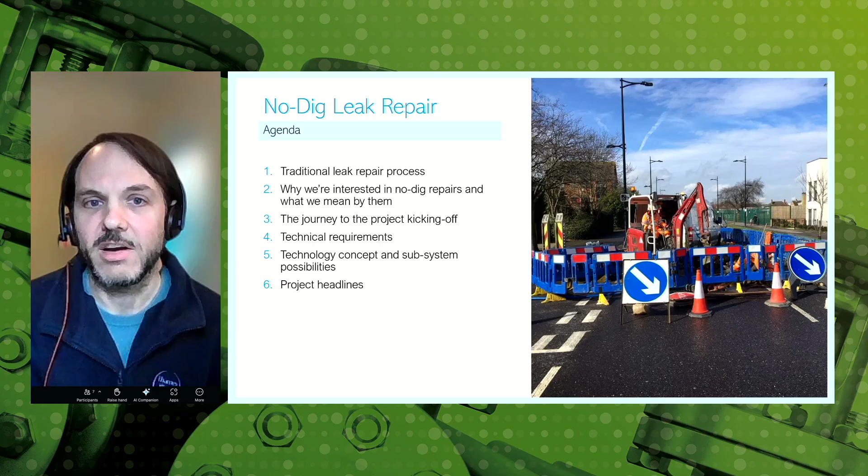Moving on, the project is not looking to do anything at all about the detection process. So the process as is would be the process that we would be using. I don't want to focus on that in detail, but just to emphasize that process will typically end with blue paint on the road, marking up a 1 meter square, and that's about as well as we can know the location of the leak before we dig. And that excavation might need to be extended - it's not guaranteed to be within that 1 meter.

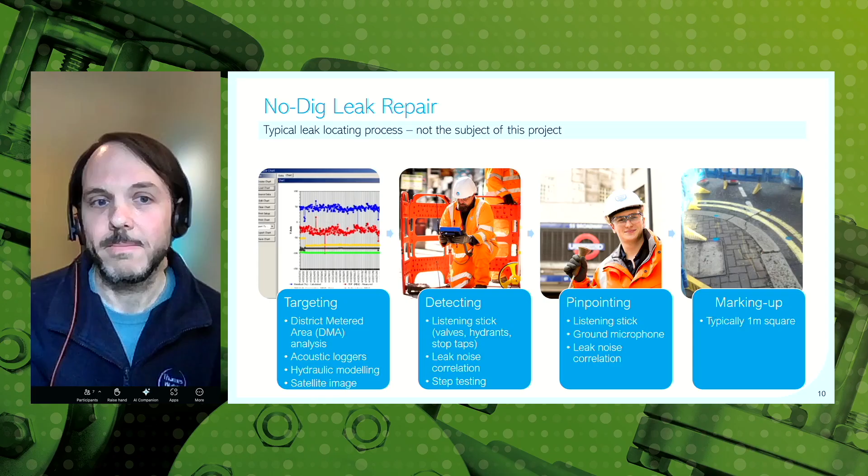So next slide. The leak repair process we're currently all using is essentially quite a protracted process. Some of us are more efficient than others at getting from one end to the other, but it's quite an onerous process. I'm not talking about emergency digs here, I'm not talking about burst mains - this is all about hidden leakage. So you've got planning, lots of planning steps involved, liaison with the highway authority, scheduling resource, and this process might be days, it might be weeks.

And then when you get to site, you've got to set up the site, traffic management, do your buried utility tracing, and then you've probably got somebody else coming to do the repair, to excavate and pump out. You might need to have some technicians available to throttle the main or even isolate it. And then you get onto the actual repair itself.

And once you've done that, then probably you've got a different team who come along and backfill, possibly someone else again to do reinstatement. And then you've got to clear the site. So that's quite a protracted process.

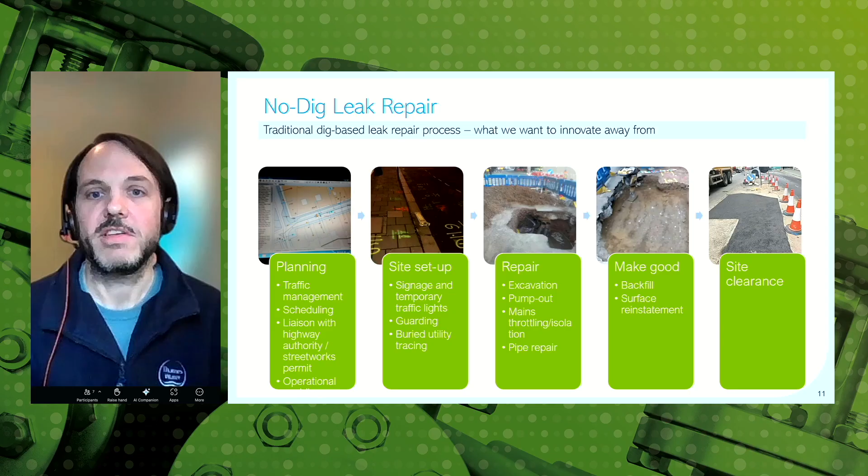So moving on, the reasons why - first of all, just a slide on the actual types of failures we see. So not all of these are likely to be hidden leaks.

Some of them are going to be visible. We've got quite a variety of leaks. And the reason I'm showing these is because we're not likely to be able to repair all leaks that we find. So we need to be able to identify which one is which before we try and repair it.

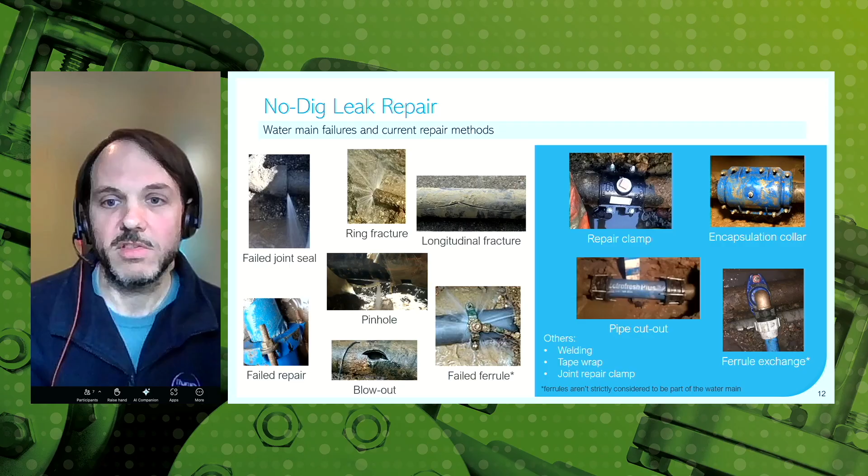And then over on the right, you've got the various different dig repair techniques. Most likely to be some form of clamp or a pipe cutout if it's a more severe failure. So realistically, what we're targeting with this project is external repair clamps. We're not looking at situations where the pipe would otherwise have to be cut out, because the chances are then that the road's been washed away anyway and we have to do a dig.

Next slide is talking about some of the key issues with the traditional process. So the cycle time I've already called out. So all the time that we're going from the leak being detected and marked up in the road through to the repair being done is water lost. And there's also the cost of all the different activities that are involved in allowing this process to happen.

We know it's a very disruptive process, causing inconvenience to customers and road users. And there's the associated societal cost with that. And then there's damage that could or sometimes does happen to roads and other utilities.

So primarily there's the safety risk with utility strikes. And then there's various additional costs that follow as a result of that consequential damage. So those are things that we all, we're trying to find a way of moving away from.

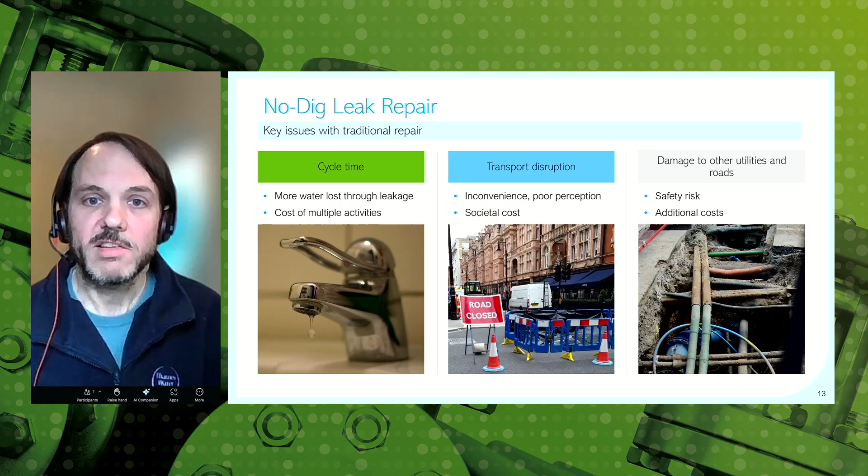Next slide. So why are we interested in no-dig leak repairs? So I've taken out the slide that I would have given on the background to leakage, because this is the leakage conference, so no need to hammer that home.

But just to kind of reiterate something that Jeff mentioned in the introduction, and which sounds like JSE talked about yesterday. So on the PALM acronym, we know that there's a lot more been going on historically on awareness and location of leaks, with less attention being given to preventing and mending leaks. So Jeff's already mentioned about mains renewal not being a viable approach, at least in the short term, to delivering the kind of ramp up in leakage reduction that we need.

Can we just do more traditional find and fix? Yes, within reason, but as I said, it's very disruptive. So with the diminishing returns we get from fixing smaller and smaller leaks, that disruption becomes less and less proportionate. And we're going to reach a point where that's not credible either. So we think that a repair solution that avoids interruptions to supply and reduces transport disruption markedly could play a key role. So we're kind of seeking a transformational change here, really, to water mains repairs.

We're almost kind of skipping a couple of steps ahead and looking at what the ultimate future could be like. And we want to increase the rate of leakage reduction, but also have it happening at lower cost. Next slide.

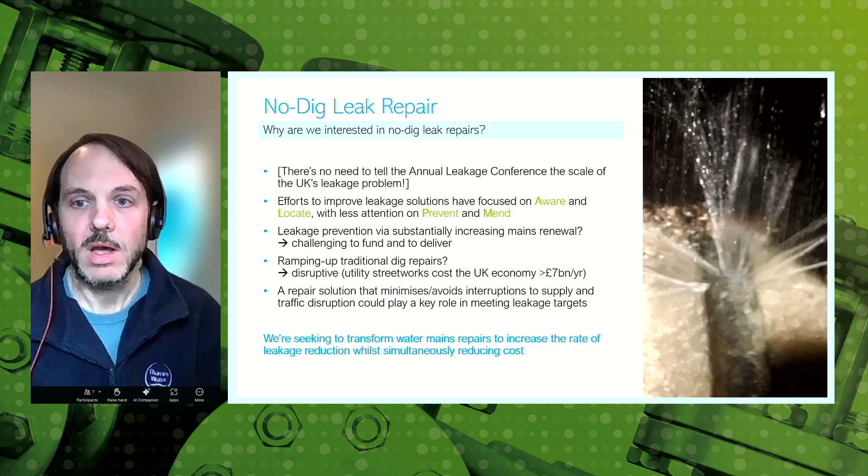So what are we aiming to achieve? So there's a diagram on the right that's kind of like an illustration of the kind of the principle. We want a technology that is able to enter a water main via an existing asset, probably a fire hydrant. But the point is, we don't want to have to dig to install a new asset. We then want to be able to locate and identify the leak.

So if we know that it's the wrong kind of leak to repair, we won't attempt to repair. There's no point. We also need to be able to pinpoint it more accurately than the kind of plus or minus 1 meter, because a repair needs to be in exactly the right place.

And then we obviously want to be able to carry out the repair and test that it's been successful. And throughout all this, we want, as I said, no excavations. So not just keyhole excavations, but no excavations. Nothing wrong with keyhole excavations. I'm all for it. But this is kind of perhaps a more ambitious project than that.

We don't want to cause any supply interruptions to customers, and we want to minimise transport disruption. And we want this whole process to be completed faster than dig repairs, so not only the time on site, but also the lead time between detection and arrival on site. And it has to be competitive on things like cost, health and safety, and carbon, otherwise it's not going to get adopted.

When I was checking everything I had in these slides, I realised I'd missed out water quality. In the editing process, I removed what is the single most important requirement we've got to fulfil, which is it has to be Reg 31 compliant and not cause any deterioration of water supply to customers. So overall, the goal is to move from where we are now, where we've got lots of potential technologies that aren't yet integrated, to having a prototype no-dig leak repair solution that will be viable for future commercialization.

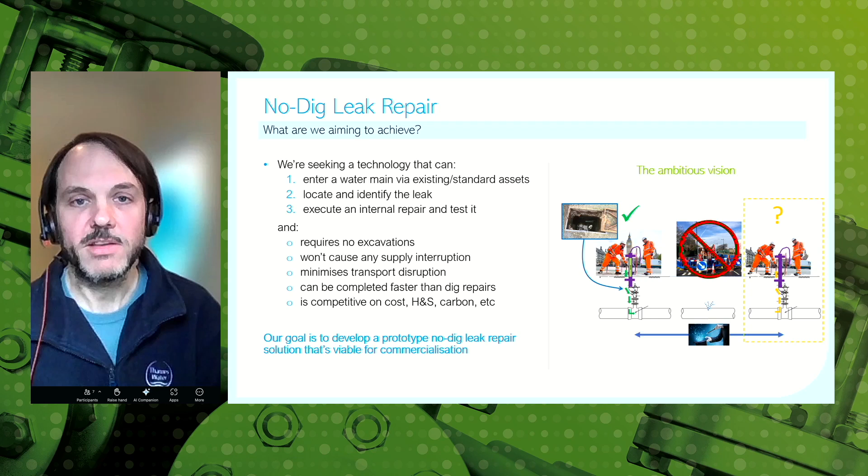So the journey we've been on - I left this in because I thought it would be of interest, because we have been on a journey. We started off thinking this could be a challenge-led project, and we went to the Ofwat Innovation Fund saying, please can we have some money - we don't know who we're going to work with, but we've got a great idea for a project.

And they said, seems a bit risky, we're not convinced about it. So we went away and did some more work, did a technology review, got some funding from Transport for London, and improved the submission. And that still didn't cut the mustard with the Ofwat Innovation Fund.

So we went away and had to think about it, spoke to Ofwat about it. We realised that the uncertainty of a challenge-led project wasn't going to get past the fund as it was then laid out. So we decided to progress with the first stages of the project ourselves and then go back later. We went to the Northumbria Innovation Festival in '22, engaged with the supply chain and the industry, and improved our technical requirements.

That helped garner interest for our sourcing process, where we had 6 bidders for a formal tendering process. We selected 2 to carry out a concept development that we funded ourselves, and that yielded 2 very credible project plans, from which we chose the one from Synthotech and their partners, ALH Systems and WRC. So when we went to the Ofwat Innovation Fund again last year at Breakthrough Challenge 4, the project was clearly a lot better developed, a lot lower risk than it had been, and we were awarded the funding.

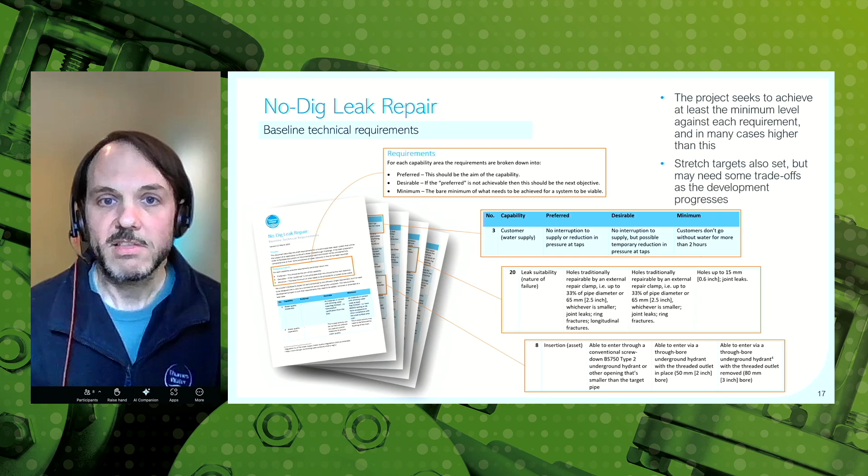So those are just kind of ideas, really. It's definitely not the case that we're talking about this being a spray lining solution. This is definitely a localized repair, but spraying a sealant on is one of the possibilities.

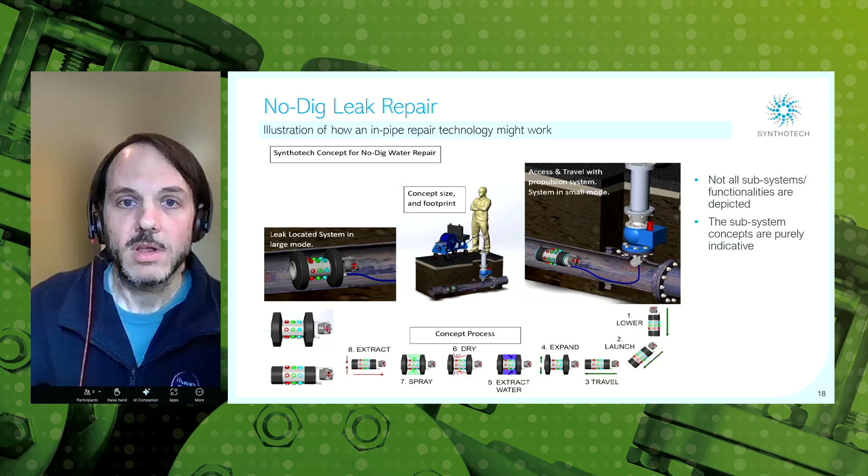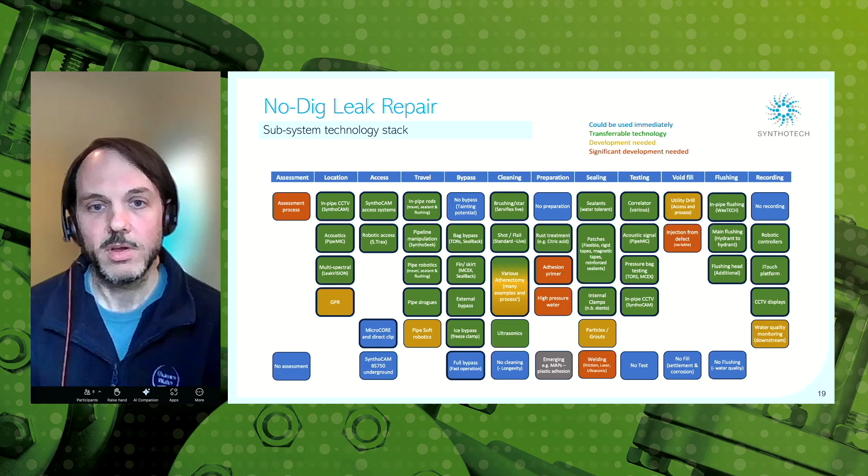So the ones in blue are already in use. Green would need a bit of development. And as you move through yellow into amber and red, those are things that are less credible. Synthotech have got lots of ideas to work through to decide which of the individual subsystems are going to be most suitable for integrating into a final product.

We've got funding from Dŵr Cymru Welsh Water, Southern Water and Transport for London, and a whole load of other water companies providing the breadth and oversight to ensure this is an industry-wide suitable solution. We certainly don't want this to be a Thames Water solution, because that's not going to have the scale we want it to achieve.

And phase 5 is actually a thread that goes throughout. We all know knowledge transfer is an important part of these projects. We think it's going to be an absolutely crucial part of this project, because the project ends with a prototype being demonstrated - it doesn't end with commercialization.

So we want this project not only to help Synthotech move towards commercial use of this type of technology, we also want the rest of the supply chain to take interest and pick it up - maybe using different materials than we're looking at, maybe throwing in different ideas for how to do different aspects of it.

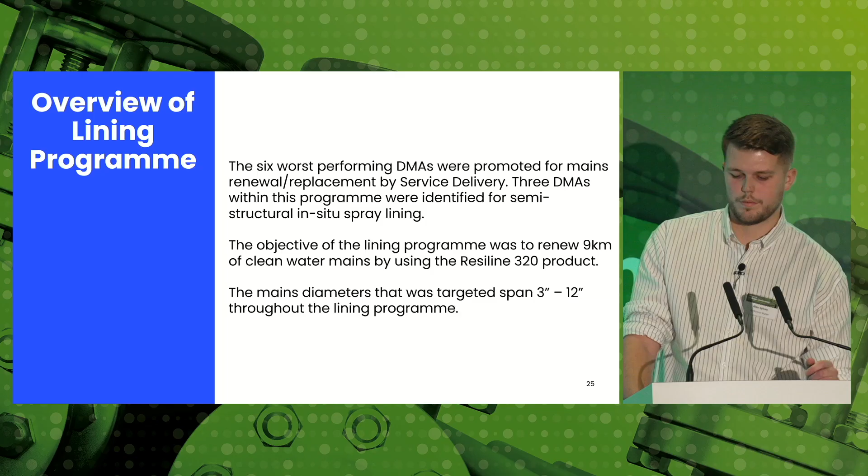So I'm just going to go into a bit of a day in the life at Yorkshire Water and where we tend to start off and what each step goes through on that process within that day. So the start off is the cleaning of the water main. Just to mention, this is all done within the isolation period of 3 hours.

So the live water main is isolated, cut out, and we go from fitting to fitting. So if there's 2 valves either side, they'll be exposed, removed, and then we use those 2 as the reception pits for the lining.

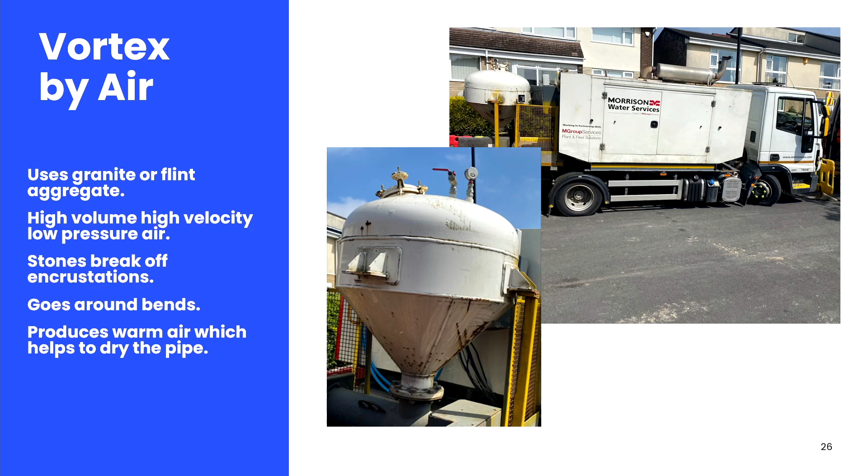So that'll usually span over about 300 metres depending on the size of the water main and also the condition, as well as pre-investigation works that we've already done on that section of main.

The first part is we use a cleaning method called Vortex by Air, which is the Whirlwind, used by Morrison Water Services at this moment in time. The ins and outs of it is we use air.

To blow through a vortex within the water pipe, and it'll go from one side into the reception side. And also, if there's high incrustation in that area of the water main, we also use flint or granite double-washed aggregate to remove any incrustation within that main. So it's high volume, high velocity, but with low pressurised air going into that system.

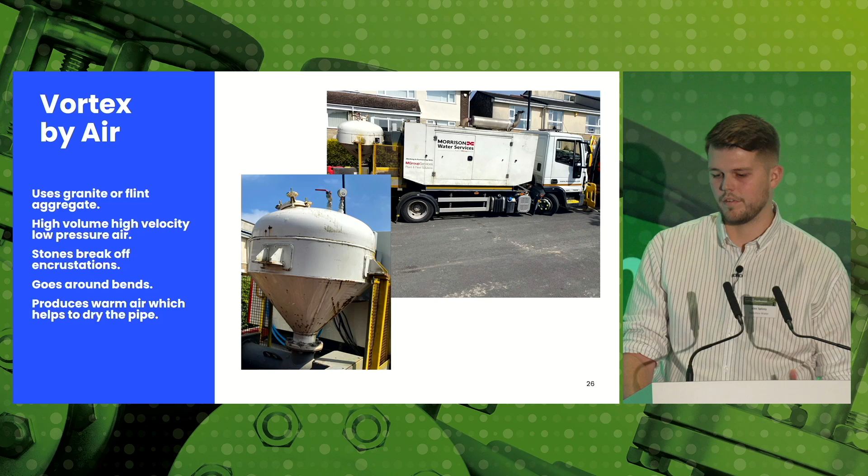The good thing about this as well is it does go around bends, so it's been a big win for us using this system throughout the whole of the programme. It also produces warm air, which helps to dry the pipe along the side of us cleaning it, which is really good.

I'm just going to show you a diagram of what it tends to look like on site. You've got your aggregate pots and your blower unit with a connection pipe from one side of the water main. The vortex of air or stone goes through there to clean that pipe, then it'll go back into another connection pipe, and an aggregate catcher will take that in.

We look to use 3 to 8 inch diameter mains for this method. We also use drag scraping for anything above 8 inch. And with that, it cleans and dries it within an hour as well, which is a big win for us on the isolation period.

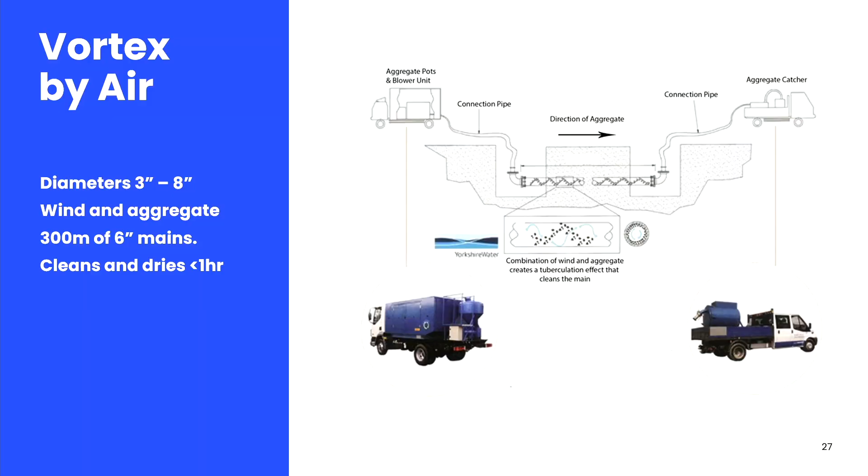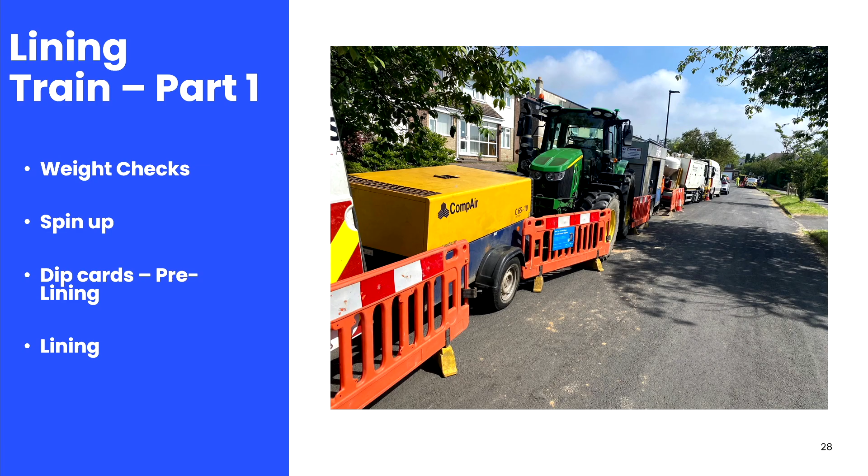On the lining rig just behind the tractor at the moment, that's where all the magic happens in effect. The hoses, the paint, is all weighed and measured out in this area. We have to carry out 3 weight checks on the lining material to make sure it's to the right mix ratio for the correct application.

That's done at the preliminary stage, and also the tanks are always warmed up to their optimal temperature to ensure that the material is cured and set at the right temperature.

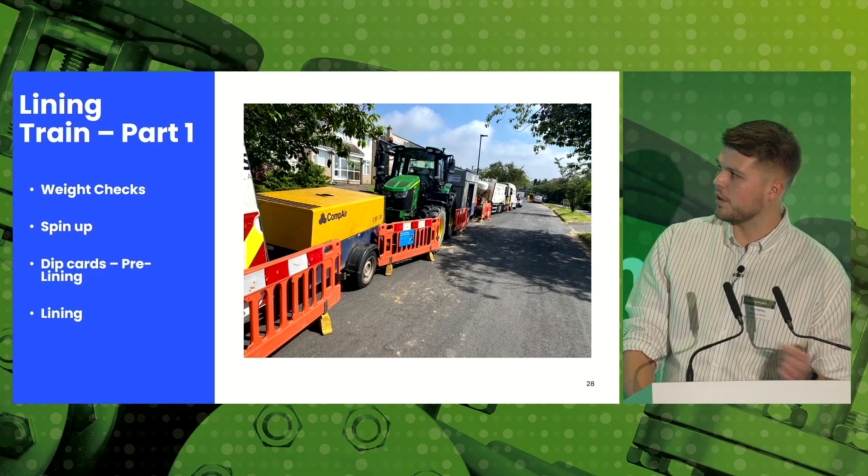After that, you pull your hoses through after your cleaning, put the lining head to the first reception pit at the other side of the job, and you'll carry out a spin up. At that point you're making sure all your paint's mixed together correctly.

Then you will take your dip cards pre-lining. The dip cards are taken to ensure the mixture of the paint is in the correct thickness, the tactility is fantastic, and also to make sure there's no other concerns that can be raised from a visual look at that dip card. Once you've done 3 of those dip cards at 10-second intervals, you'll then begin with the lining.

The lining commences by putting the lining head within the pipe, and the lining rig's got a controlled flow meter unit that will pull the lining hose back throughout the main at a constant flow. That's all controlled electronically, and if there are any issues with the flow or anything inputted into the rig, there are tolerance limits.

With the flow rate, if it goes plus or minus 10% of the flow that's in there, or the thickness that's applied, an alarm will raise and that will shut off the rig, and that section will be abandoned if it's not deemed suitable for the criteria we need to meet to agree that. That's a little bit at the start of the project of the lining section.

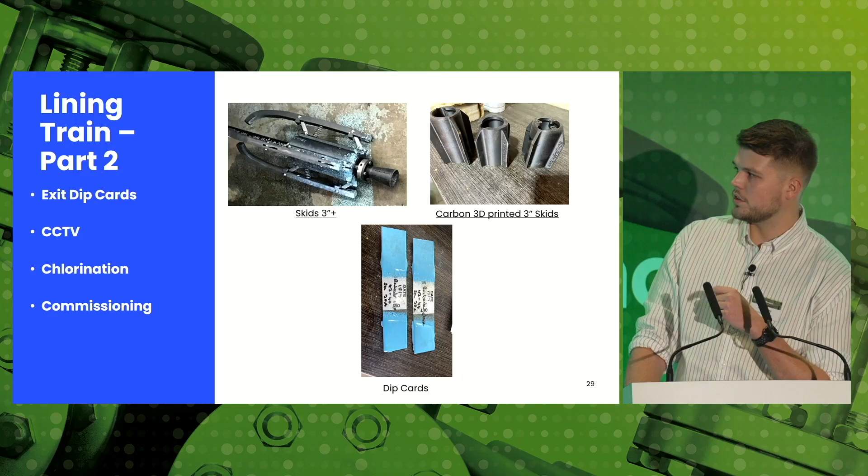Once that's done, we will go in and have a look and make sure that all the lining is uniform and there's no misses or misjoints, anything that could cause a potential defect, and a re-investigation into that, and a dig out and remove.

So the 2 pictures at the top, we've got the lining skids. The top right is what we use for the 3-inch work that we did in York. It's a bit of innovation - a 3D carbon printed skid.

This gives us a lot of benefit on the 3-inch schemes, because we've had a lot of issues historically with bends in this area, and this removed that massively. So it was a really good success story. And then anything above 3 inches, we use the more traditional skid that we've got there.

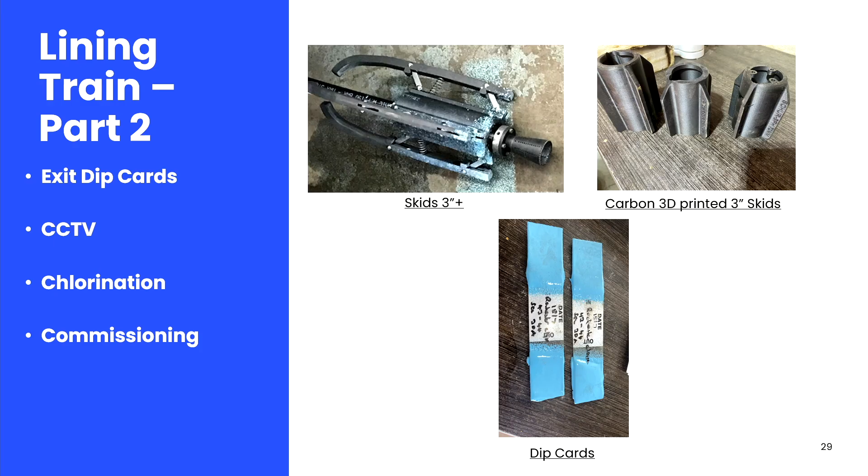From the CCTV then, once the hour cure is complete, we will then go into the chlorination unit. The Whirlwind has its own chlorination bowser, which puts 1,000 parts per million and sprays that into the new line pipe. From there, the main will then be flushed and be back into commission, all within the 2 hours and 59-minute isolation period.

So these are just a bit of an image for you guys to see. The top is from the works at West Bar Green, on an asbestos cement pipe. For obvious reasons, we weren't putting any flint or aggregate down on this one because we didn't want to expose any fibres. So it was just mainly air that we put down to dry the pipe.

And on the right is the lining once carried out. The bottom left is the 3-inch cast iron that was being worked on at Chestnut Avenue in Stockton Lane in York. Historically 3 inch has always been a bit of a hindrance for us guys trying to line. So the use of these skids, and also the Whirlwind and the vortex by air using the flint and aggregate, has provided a lot of benefit in this area.

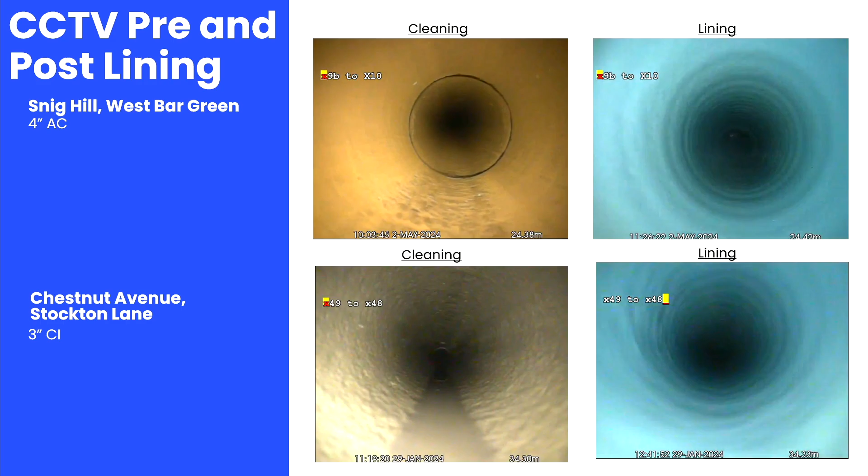It's been fantastic. In terms of quality control audit purposes, we do have the 7 different remits that we've got on there. So after every lining that's carried out, we need to make sure that the CCTV cleaning documentation is there - the video, CCTV lining, a CCTV report, a quality assurance document is carried out, dip cards are still saved, and the rig printout from the rig itself should be in place.

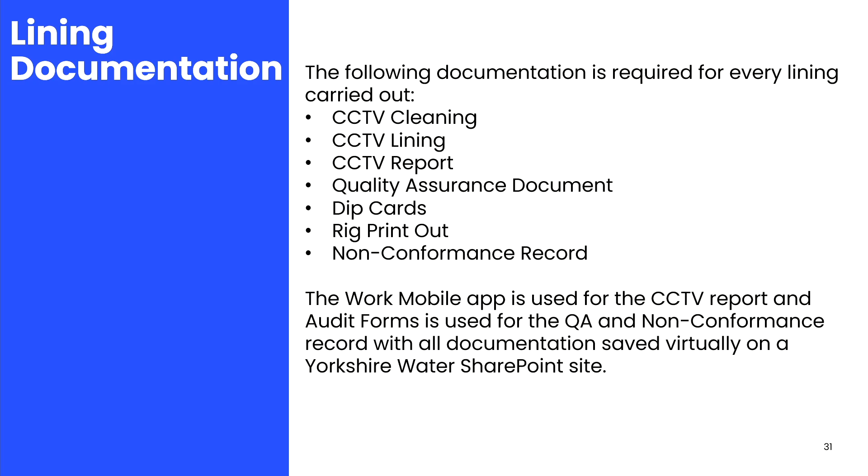And a non-conformance record - so if there is any defects at all, it is noted, and there's mitigation method processes that have been put in place. This is all done electronically now, other than the rig printout and the dip cards, which are still - images are taken and stored on an internal share drive. We've got quite a lot of cameras and videos of clean pipes and line pipes at the minute.

In terms of the outcomes, the 9 kilometres have now all been lined and successfully renewed using that semi-structural lining method. West Bar Green is beneficially complete with final sections of open cut being carried out on Fulwood and Stockton Lane. In terms of cost saving, just for West Bar Green alone, we did have a £560,000 saving using semi-structural lining compared to traditional methods.

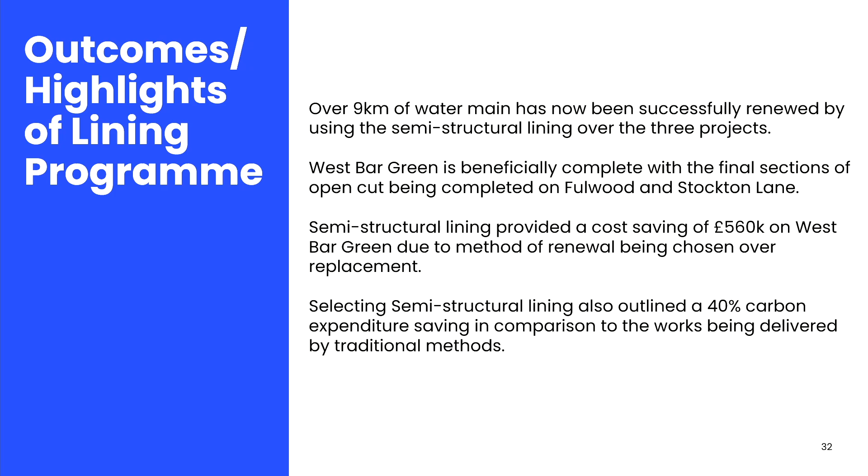The semi-structural lining also outlined a 40% carbon expenditure saving in comparison to the works being delivered by traditional methods. Like I said, it's just 2 excavations instead of a long trench with the traditional methods. So there's been masses and masses of savings in that respect.

In terms of the key learnings from the lining process, I'd say the big one is the cleaning time. It's something that needs to be worked on because I think within the process of cleaning your pipe into your final lining, your commissioning, your flushing out for samples, you've probably got on a good day a 10-minute window period if your cleaning goes well.

It's something we're actively looking at the minute. We're speaking with suppliers and manufacturers about getting that cleaning time down. But two good success stories were the methods used for preparing ferrules before lining.

On site we called it ferrule sucking. In effect, it's putting a cap end on the back of the main, charging some air through with the whirlwind, and just opening and closing the ferrules to get any sediment or material that might have gone in there from the cleaning process originally out of the system.

That was a massive success, because at the start of the project we had a 45% blockage rate in the first couple of months. After adopting this method, we got it down to 4% by the end of the whole programme.

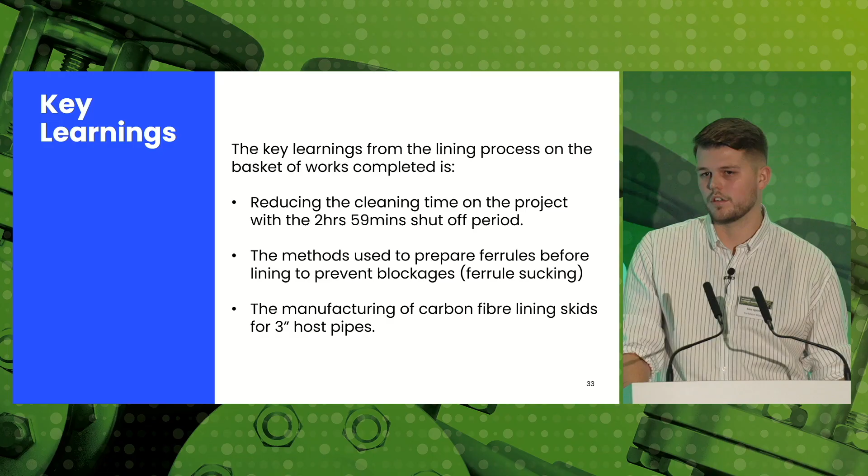We also used the carbon fibre lining skids for the 3-inch host pipes. There's been ongoing issues in the past with 3-inch cast iron, and using these techniques we've been able to line around the acute bends, which has been a really big win for us and improved the meterage we've been outputting on a weekly basis. So that's everything from me, and I'm sure there will be questions.

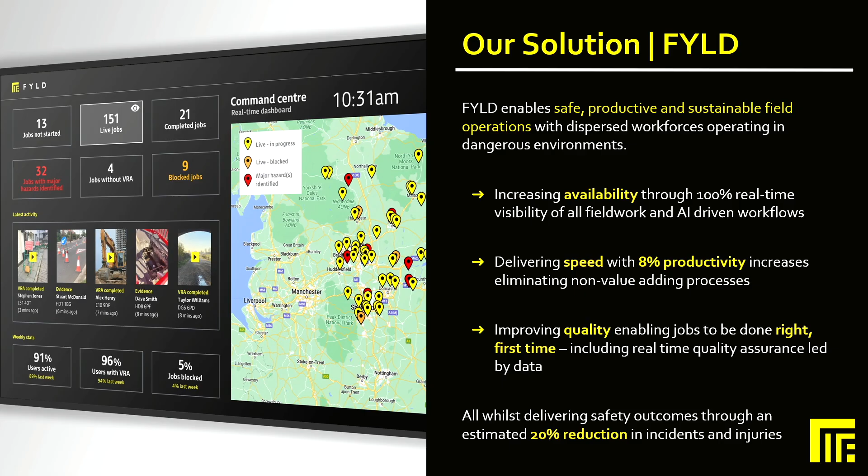Now what became interesting, when we started evaluating the process of how leaks are actually promoted from Yorkshire Water to Morrisons, we started to unpack that there were probably quite a lot of blind spots that could lead to delays or not getting to that repair and delivering it in the target time you had. So we approached Yorkshire Water and started talking to them.

If we got your leakage inspectors to use our mobile application to take videos of when they've located the leak, when they've marked up, what's the condition around that leak, and in turn, if that is shared with the planning department at Morrisons in real time, what's the actual benefit of that?

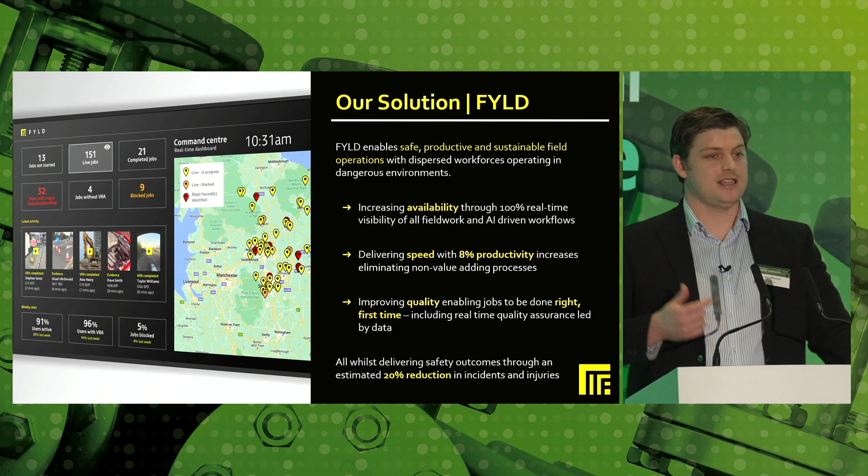Well, what we were seeing is that around 20% of the time, prior to using FYLD, they're having to conduct a site visit because they might not understand, okay, at that location where they've marked up, what are the TM requirements? Does it need to be out of hours? Is it in a customer's driveway? And often that could lead to the need for an additional site visit to be added in order to go and understand how you can successfully plan that job and then execute it.

Whereas now the process that we've embedded, you've got that Yorkshire Water technician using FYLD to take a video of the condition of where he's marked up. That planner can view it in real time and then schedule that to be released to operations.

So Karen and Steve are going to go into a little bit more detail around what that looks like.

I think my own reflection has been fundamentally a real behavior change from the ground. I think often static photo capture and manual data entry can be a bit limited. So when you start leveraging the experience of the operatives on the network, asking them to talk through what they see and show you, it's really increased the quality of information we're getting, and that information sharing between all the stakeholders within that leaks life cycle is what's driving speed and ultimately reducing leak runtime. So I'll hand over to Karen to talk to you about that from a Yorkshire Water perspective.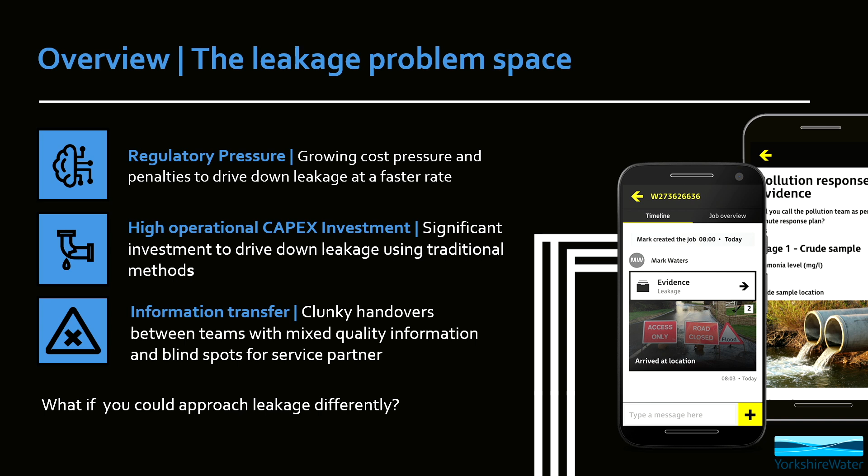So I guess this morning we've heard quite a lot about how expensive R&M can be, and we recognise there's quite a lot of waste in our processes. So we do spend a lot of money on dry holes. We don't always get it right first time. And the time taken to get a leak from the point we mark it on the ground to it being repaired can be quite long and protracted. So one of our business plan initiatives this year was to reduce the runtime of leaks.

Our processes, though, are quite clunky. So we use SAP to manage our work, and there are a limited number of text characters we can use in SAP to describe what we're doing, and we used to attach a photograph. But the processes were pretty poorly adhered to, really, and photos weren't really being looked at by the planners. They were using Google Street View to do planning and scheduling. Sometimes a blue mark would wash off.

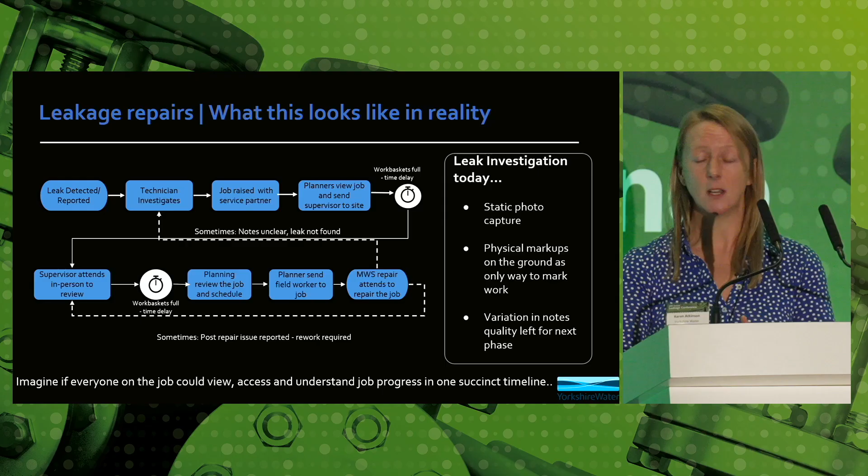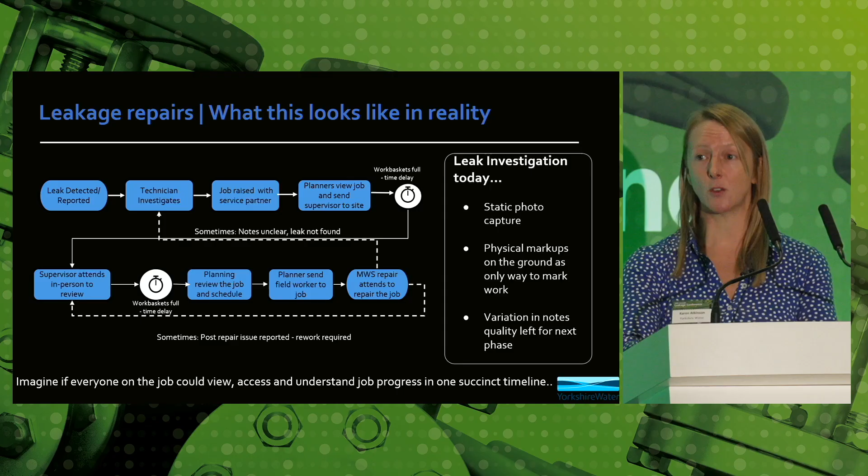And our leak inspectors felt a little bit disconnected from the process, and they were also struggling sometimes to understand when a leak had been repaired. If the quality wasn't quite there, they'd go back to site, check it, there was still a noise there, and they couldn't really understand what had gone on, because once the job went into the SAP machine, they never saw it again.

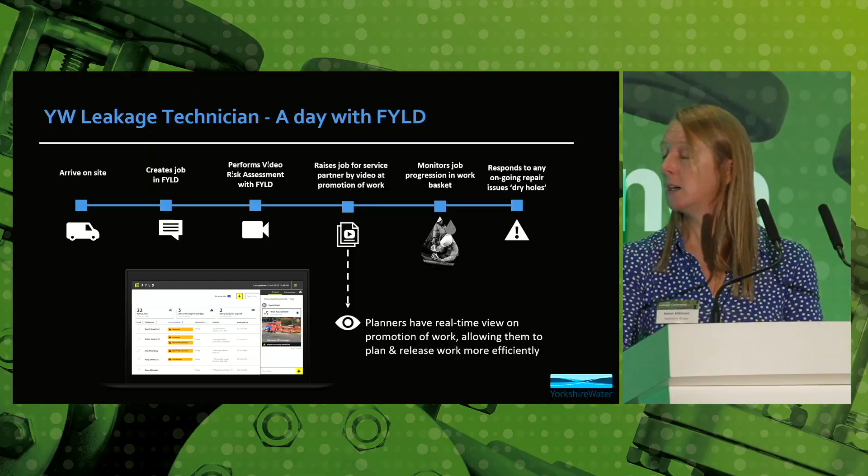So what it looks like today, a leak inspector arrives on site, and we actually use the FYLD app for our point of work risk assessments as well as our work promotion photos. I think previously our point of work risk assessments from a leak inspector perspective were probably a little bit of a tick box exercise, and it was a process they had to go through.

But if you ask me what kept me awake at night, apart from hitting the leakage target, it would be the safety of my leakage inspectors when they're working in the highway. And now, when they're doing a FYLD risk assessment, when they're doing that video, it's really obvious to capture some of the risks, and therefore they're able to mitigate these risks in a much better way than they were previously.

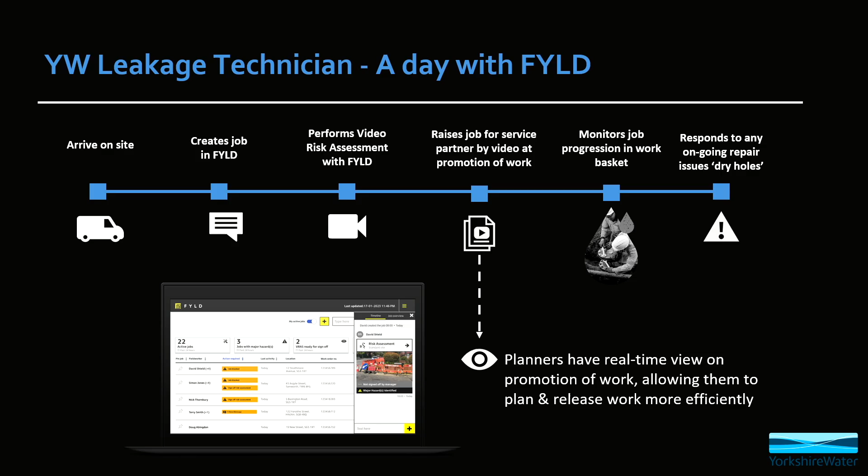But then when they put a blue mark on the ground, they'll take a really good quality video. And we have had a mixed buy-in. I guess our Snap generation field and leakage inspectors have taken to it perhaps a little bit better.

But actually, there's really good engagement, because what they can do, they can tag themselves in the job. So as soon as the gang on site on that job, when they're doing their risk assessment, the leakage inspector gets notifications so they know the gang are there.

Our leakage inspectors might take a few days to walk around a DMA, so they might have promoted that leak yesterday, and it might be getting repaired tomorrow, so they might still be around. So they might be able to pop past, they can go back and check, they can check the workmanship, and if they're not happy, they can see the quality, they can see what the gang have done on site and assess whether they got what they asked for.

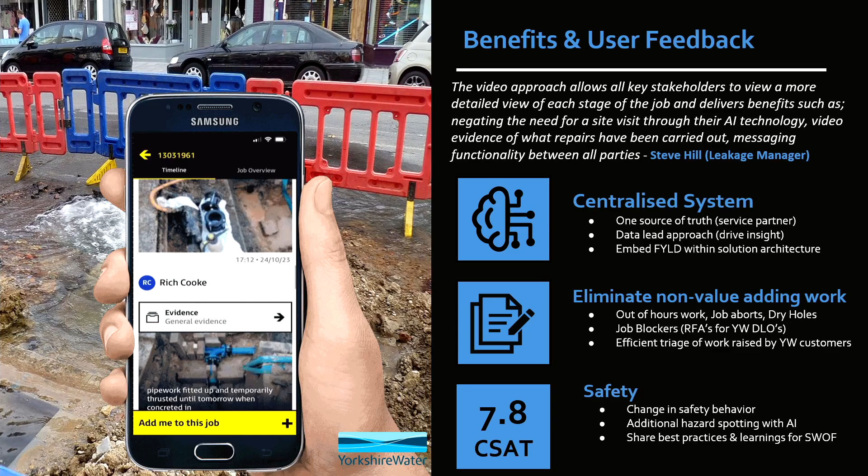So the other thing, like I said, we don't always get it right. We do have a high proportion of dry holes. I push my leakage inspectors quite hard for promotion, and sometimes, you know, the lower the volume of leak, the harder it can be to pinpoint.

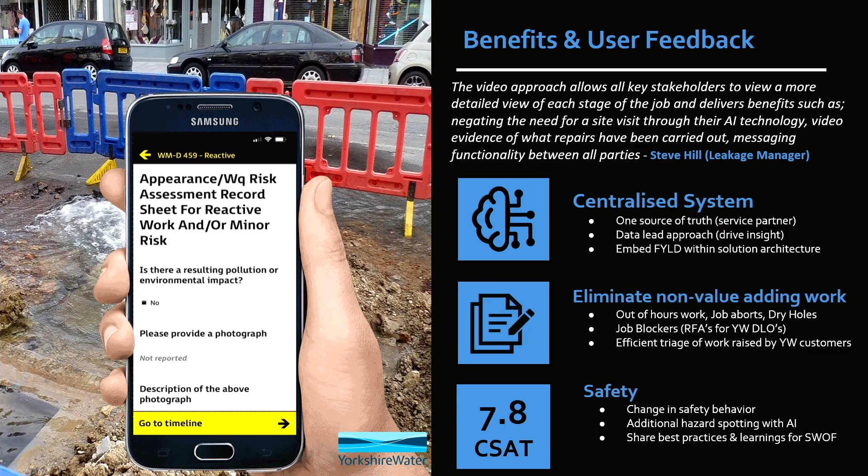So when the gang are on site, the leakage inspector can see a video. So we're working towards a video request for assistance from the gang. So we can ask them to dig further. We can assess whether they've dug what we wanted them to. So it's been a really positive

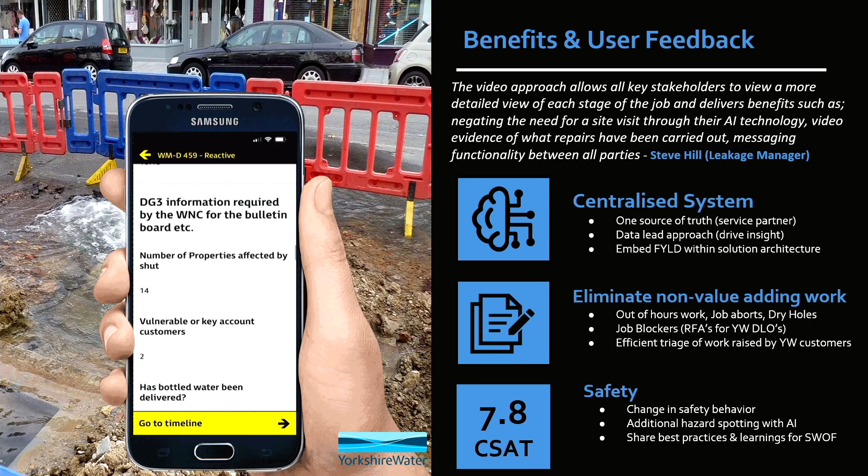process. The other benefit is we have just seen the life of a leak come down across the patch. So I think the majority of that is to do with the planners just planning more effectively, and everybody, and the end-to-end process just shortening down. And obviously, if we reduce our leak run time, we can promote less leaks.

Okay, so just leading on to the repair aspect, I think the most tangible sort of benefit from use of FYLD that we've seen is the reduction in need for site visits from supervisors pre-repair. Karen touched on leak life before. I think any opportunity to kind of shorten that through optimising processes is obviously greatly appreciated and vastly helps in the leakage arena. Obviously, resourcing, cost efficiency, etc., all optimised throughout that.

So in terms of the R&M aspect, so fast-paced environment, as we know, reactive to issues on the network. Obviously difficult to allocate resources and deliver first time. So obviously we all know we're under very strict time constraints. Blind spots from the ground significantly reduced through this. So previous lack of visibility is obviously enhanced vastly throughout the use of FYLD.

We're able to highlight the high-risk jobs and anything that could cause delays. Obviously, mitigating factors or mitigations rather put in place to reduce those. And we've seen a big reduction in fines, penalties, and what have you. So increased compliance through the ability to sort of forward plan and see site conditions through use of the app.

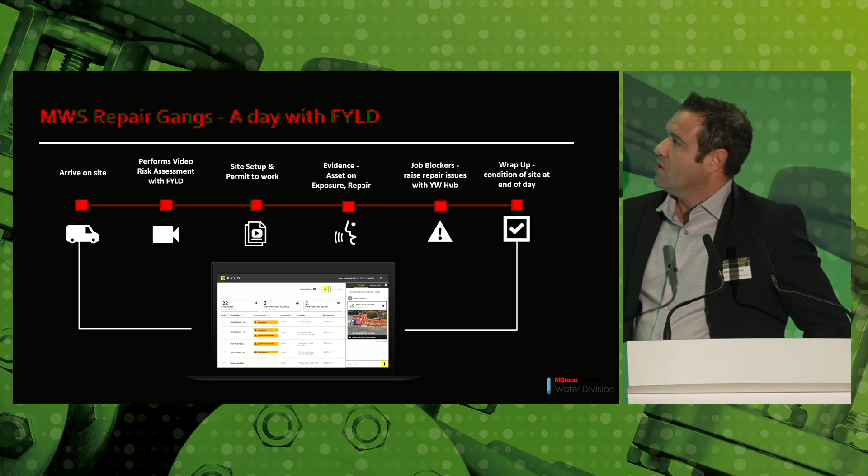So in terms of a day in the life of a repair gang, so arriving on site, the guys then take a risk assessment on FYLD, as was mentioned before, giving us a clear view of site conditions, site setup, and then obviously once the repair is undertaken, there's a video taken again then to sort of give us satisfaction that the job's been done as requested. Also gives us a chance to sort of share learning in any instances of dry holes, etc.

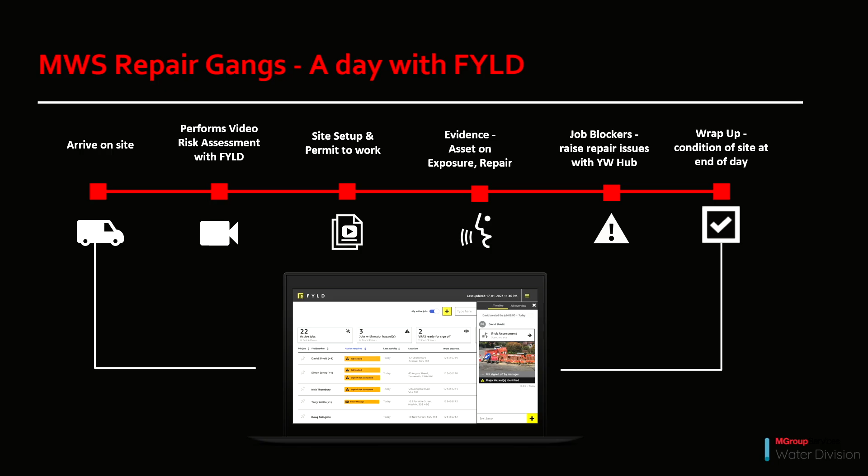Any job blockers, so we can raise repair issues with the Yorkshire Water Hub. I think another benefit we've seen is the ability in some instances to issue instructions to the gang from the hub without the need for a site visit. So we can ask the guys to chase the leak, etc. And then at the end of the day, wrapping up, share the site conditions on site.

In terms of user feedback and the benefits we've seen: quality and resource improved collaboration with the client, improved visibility of everything on site and understanding of what's being done. We've got improved work quality through job visibility, better resource utilisation, reduced amount of aborts, reduced job failures, increasing the effectiveness of the overall resource pool.

Speed, mentioned before, leak life on a number of occasions, so a reduction in time-consuming site visits, reduction in job delays, and a change from reactive to proactive operations. Penalties, like I mentioned before, a reduction in fines, so evidence against Section 74s and MOPs, and increased street works compliance.

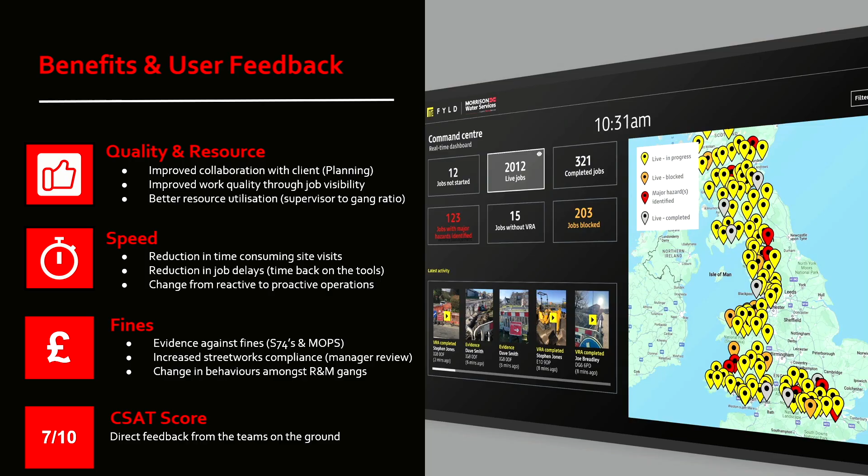Overall satisfaction and feedback from the ground has been positive, and as we enhance the process, I think we'll see that improve even further. In terms of measurables, 300k saved in fines last year, and an 8% productivity uplift, which we think we'll see increase even further.

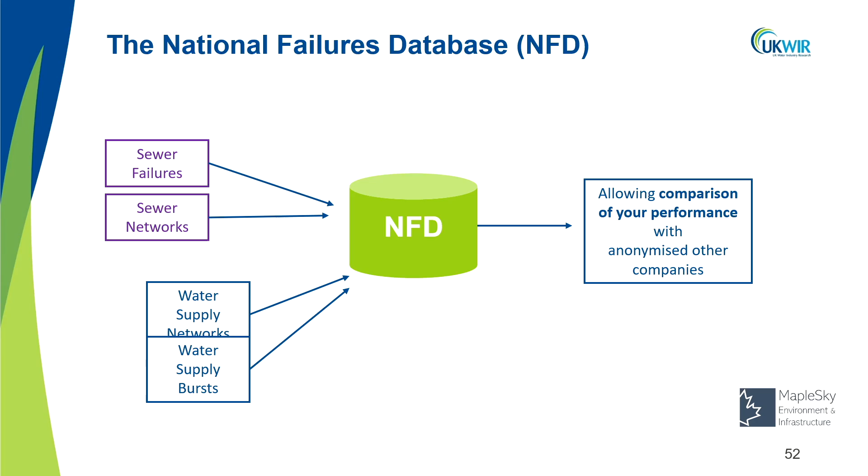Okay, what we're going to start with is a story about the NFD. This is how the NFD is designed: lots of water companies put in their networks' failures, allowing you as a water company to compare the performance of your network with others, anonymized. The problem was it was actually really hard to get data out of the NFD, and because it was hard to get data out, companies were like, well, is it really worth putting it in? So over time, contributions to the NFD slowed, and it was kind of locked away in the back of a cupboard and almost forgotten about.

Oh, it's very sad. But there are more problems arising. You know, guys, what this whole conference is about is reducing leakage. This is one of the big questions and big challenges this industry faces. We've got deteriorating assets, and of course we need to get to a low-carbon future. All of these things are made harder by climate change.

See last year's talk. Okay, so when we're looking at the NFD, we're thinking again, well, how could this help us meet these challenges? So first of all, can we get the data out? What's in it? No one really knows exactly what's in it. What can it tell us now, and how can we make it more accessible to people like you so you can do your jobs better?

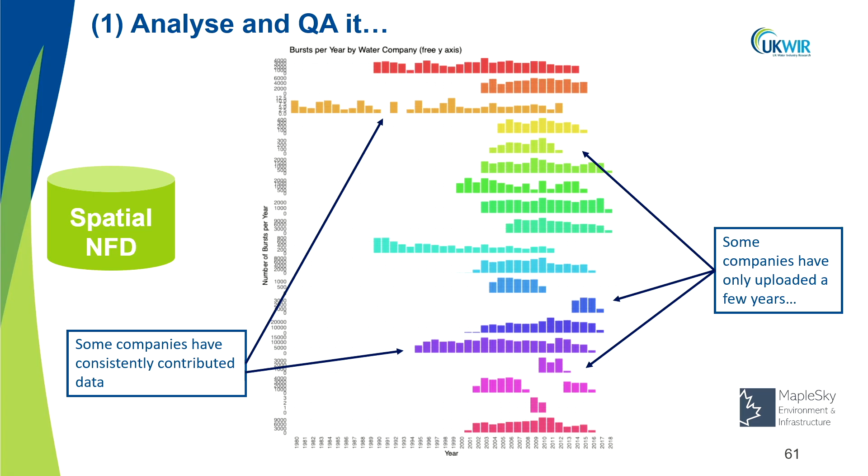So one of the first stages was actually getting data out of the NFD so we could do interesting things with it. And now we've got the data out, and it's wonderful, and we can look. So here we're just looking at bursts by the different water companies, and for each year from the 1980s on to 2018. This is like the longest run of failure database, I think, anywhere in the world. But you can see these different companies put in data, and some years they put it in, and some years they don't, so it's a little bit chaotic. And some companies have put in a lot more than others over a longer period of time.

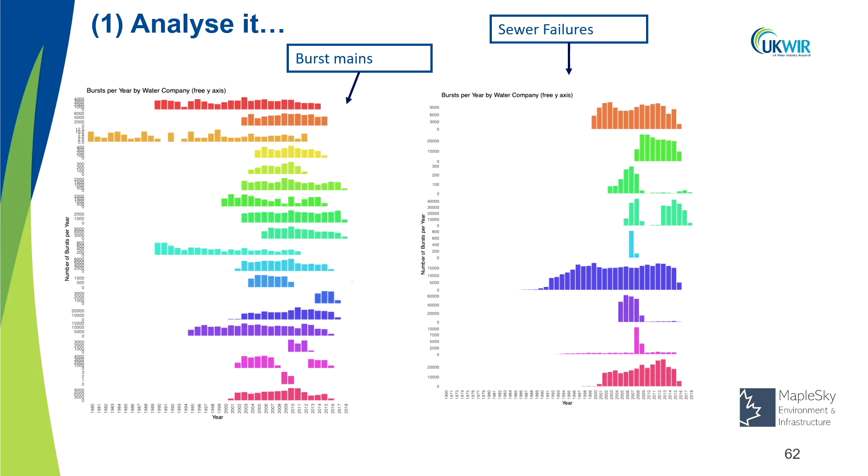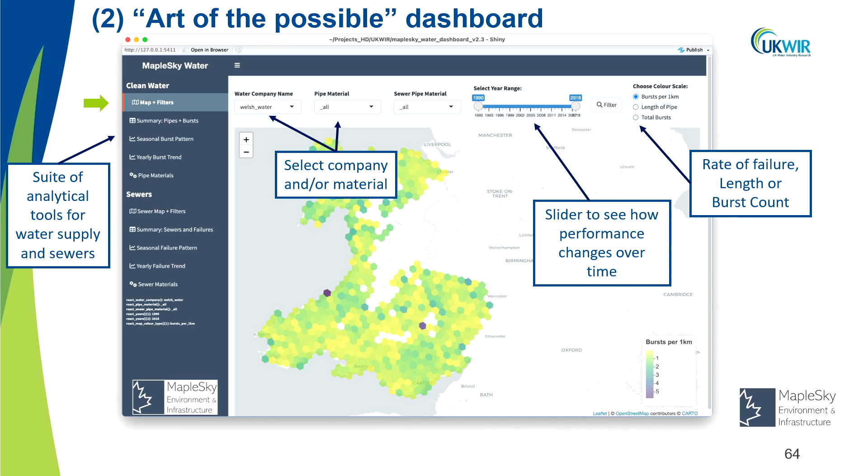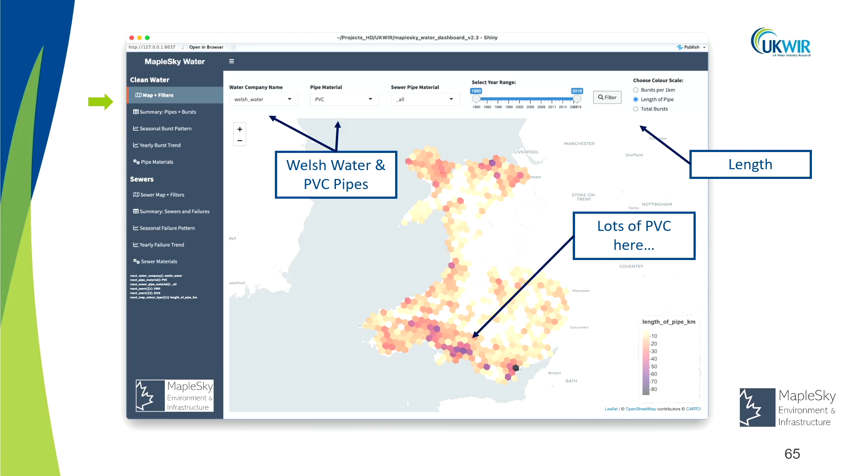So what we can do is select the company or pipe material you're looking at. Maybe we're looking at the burst rate, burst per kilometer of pipe, or the actual length. And you can fiddle around with time sliders to see how performance is changing through time. So here, rather than rate of failure, we're looking at the length of pipe, and where the PVC pipes are within the Welsh network. Of course, this isn't a fully fledged GIS system, but it's a tool where you can look at issues in a kind of spatial way, even if you're not a GIS professional. And you can zoom in and click on it to pull up lots more information.

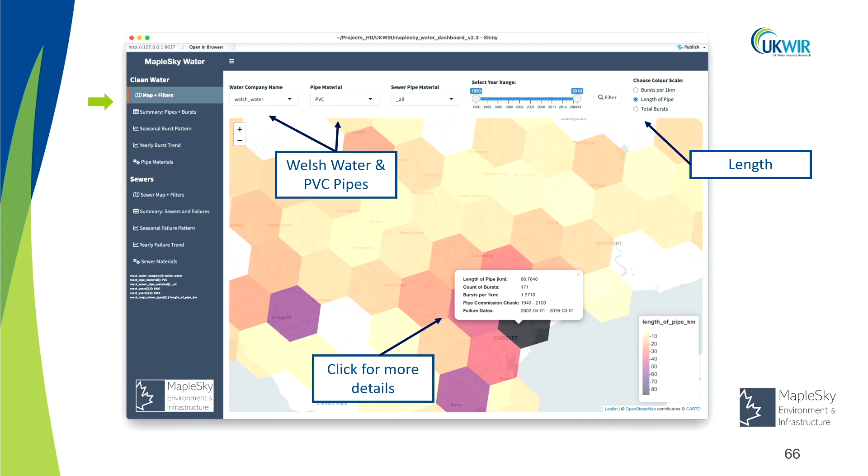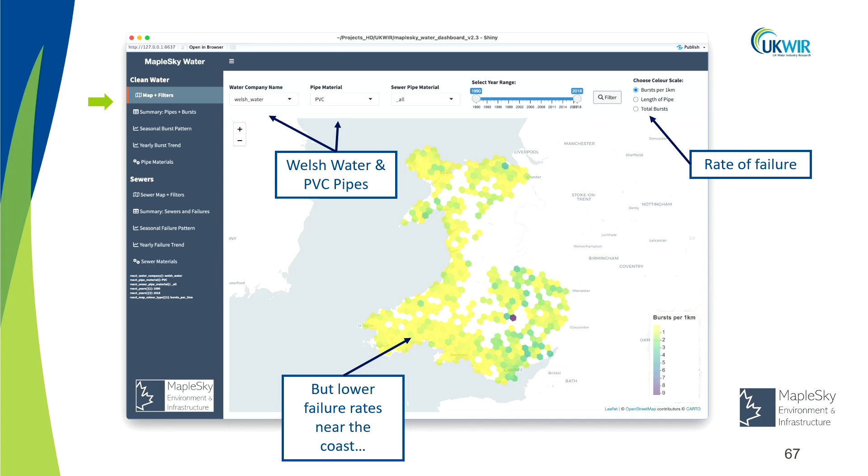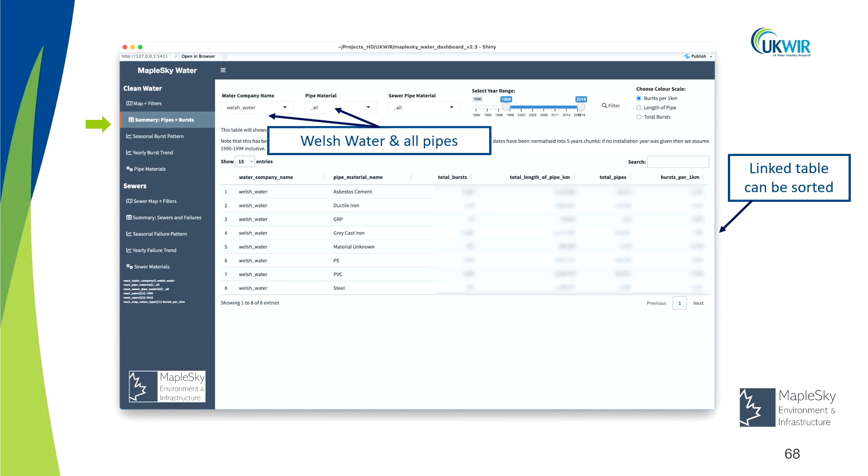And really, okay guys, I'm going to set a scene for you here. As you're looking at these slides, think, how can I use this to reduce leakage? Because I'm going to ask you for your feedback at the end. So we can see where the PVC pipes are, and we can also see where failure rates are the highest. We have lower failure rates near the coast in this case. Then, because it's all linked up, the map and the underlying data, you can query the table, sort and filter it to identify those pipe cohorts which are underperforming or performing really, really well. So I'm quite excited about it.

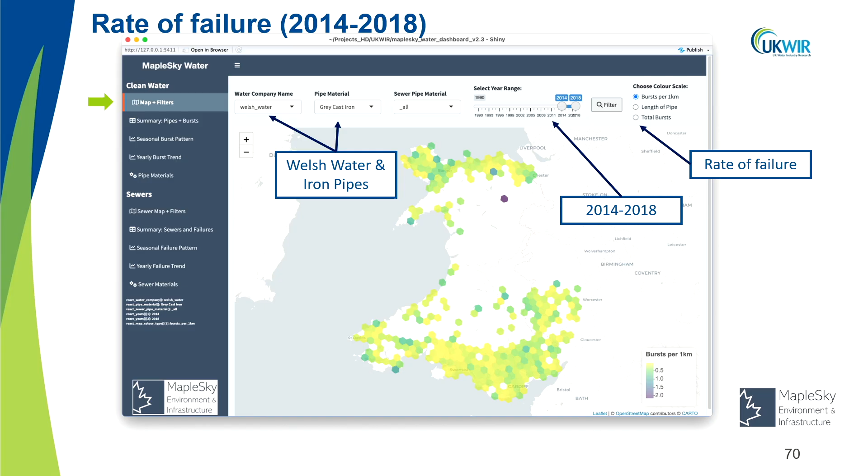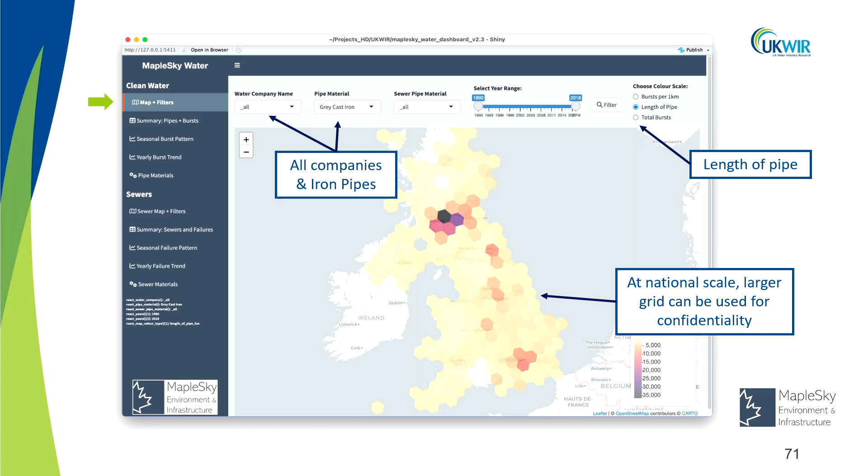And we can also zoom out and look at a broader scale of how your network compares with the rest of the country, both in terms of where your pipes are and different materials, or those rates of failure as well. Bear in mind the inconsistency of the data that was uploaded - this isn't a gorgeously perfect data science tool yet. It's more of a, this is what we could do. But here we're just looking at distribution of iron pipes across the network.

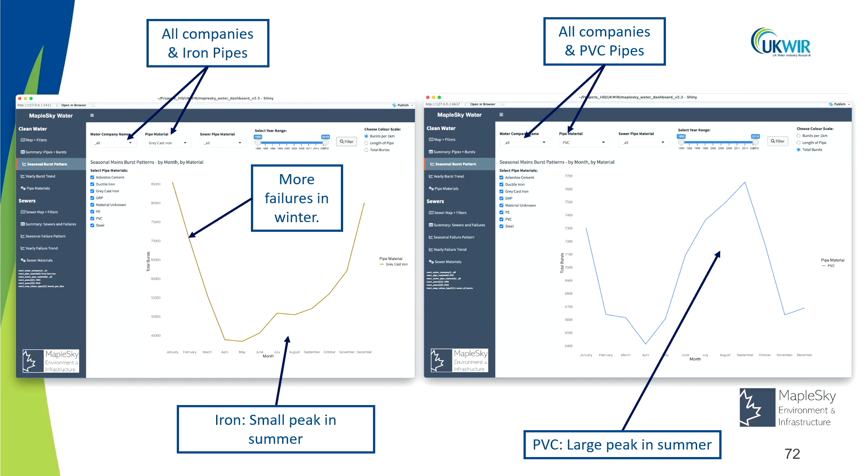Because we've built it as effectively a web-based tool, you can pull up as many different browser windows as you want. So we could compare - in this case, this is aggregating all companies' iron failures together and all companies' PVC failures. And you can see that PVC fails a lot more in the summer and iron in the winter.

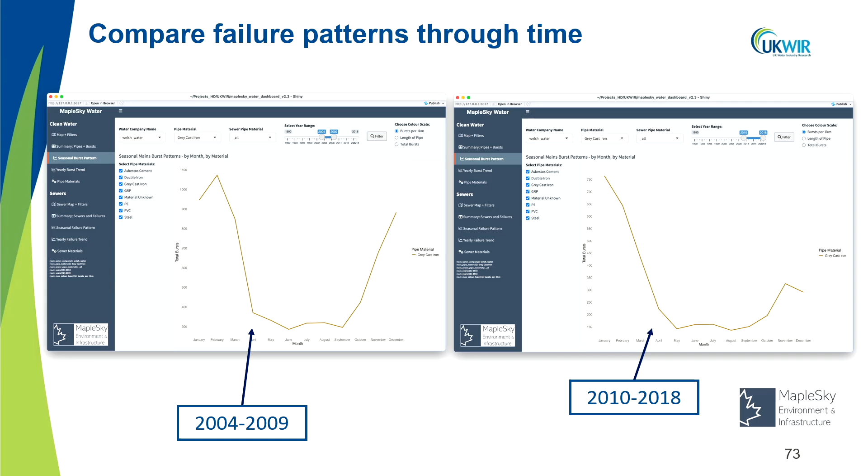You could look at, in this case, changing failure patterns through time. This is for this specific water company, and it's their failure rate between 2004/9 and 2010/18. So you can look at how failure rates might change and the links there with weather conditions and so on.

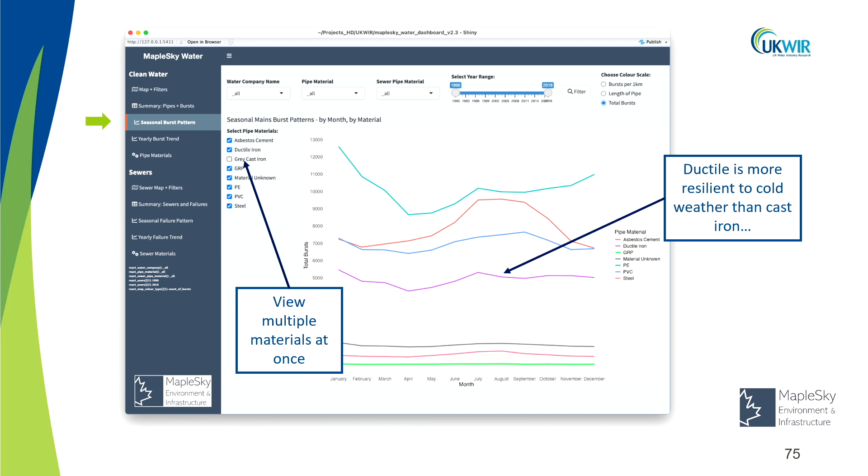The other thing we can do is select multiple materials at a time, so you can identify these summer failures in maybe PVC and AC pipes, for instance, and compare those with other similar materials and look at the impact of these hotter and drier summers which are coming on these materials.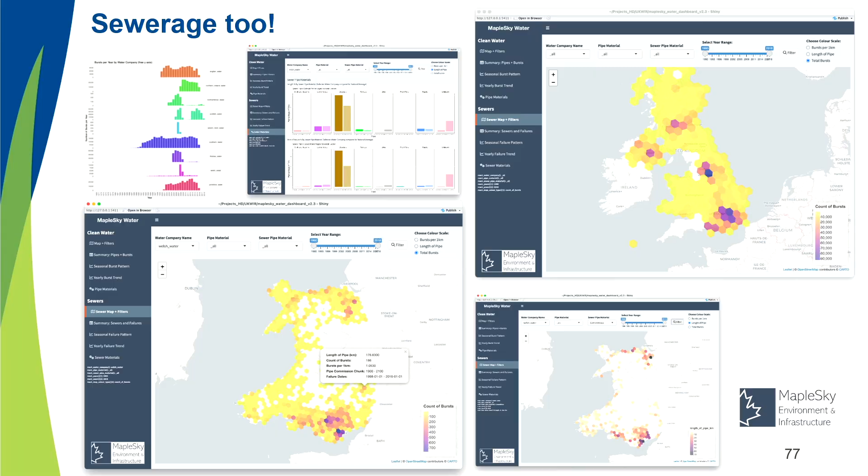I won't focus on this, sewerage. We do the same thing for the sewerage side, so tell your sewerage colleagues about this as well.

So what is coming up next? We've got a range of things we're really keen to do. We're just in the early stages of this project, but of course it's me, so I want to include weather variables in there, look at how cold weather, hot weather, dry weather impact on failure rates. And I would love now to hear from you guys about how you could use a tool like this to help you drive down leakage in your area.

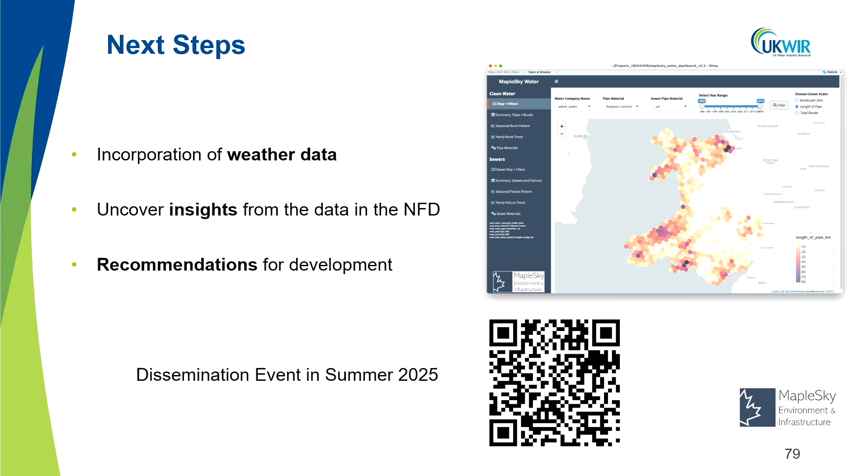So what's coming? Data. We're going to focus really on uncovering insights which are in the current NFD, and of course making recommendations for how we can improve this so it actually becomes a tool which you guys use rather than just contribute data to going into the future.

So we are going to have a dissemination event in the coming summer, and it would be great to see people from each company there.

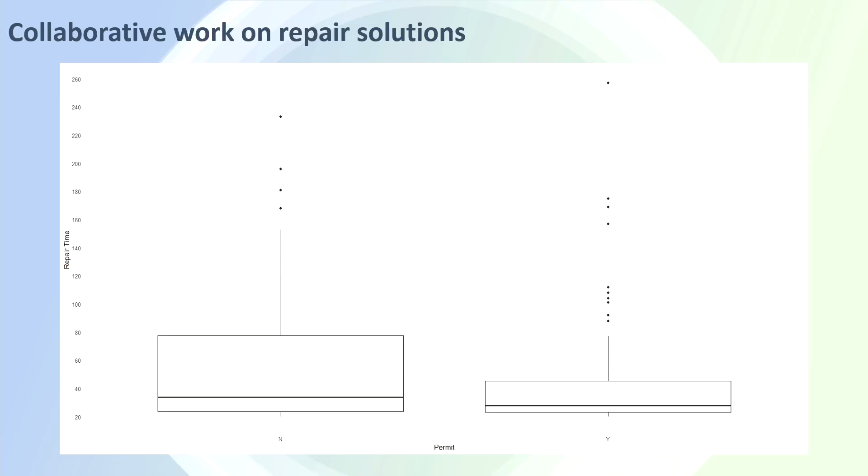Started to drill down as well and said, okay, what about permitting? Whenever we got to dig up the road, we have to take out a permit, but you don't always have to take out a permit depending upon where it is in the highway or not. Does that make a difference? And interesting, when you look at the actual averages there, there's not a huge difference, but you look at the variability and we start to go, okay, if you put a permit in, instantly that gives you a timeline that I've got to operate to. You don't want to lose that permit. So actually we were finding that permitted jobs tend to be done better than unpermitted, even though my unpermitted jobs, these ones, are probably easier to do because they're not in a highway.

What about my councils? SES Water have done some great work looking at the councils, saying okay, how does different council policy about when we're allowed in there change my repair times? Looked at three county councils in my area and said, okay, what does that do? And again, you can see starting to tease out variations.

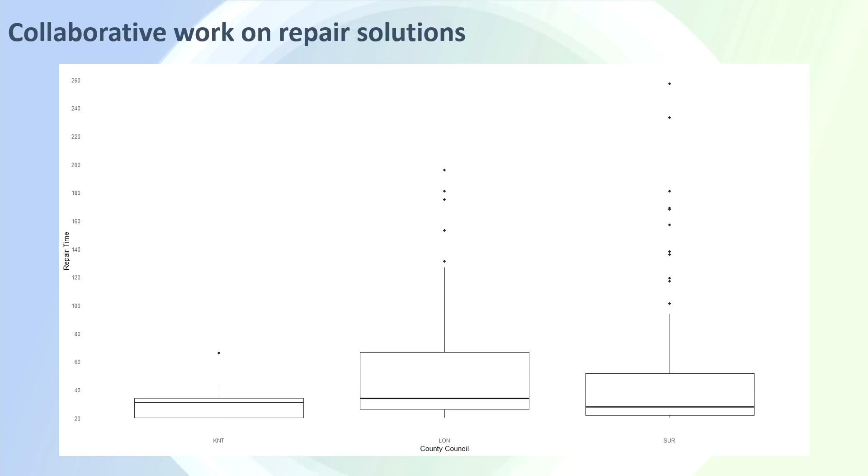At the moment, this is only saying, is there a variation? And if I talk to Leon down there and said, do you see a variation in terms of councils? Obviously you're going to say yes, absolutely. Jez, you're just telling us what we already know. We know this happens. This is the start.

What we need to do is gather our data, tease it out, and start to understand where are the strong, where are the weak correlations. Why is this council better than that council? What makes the difference between those, and how do we encourage those ones that struggle during the process to change?

This is about entering into dialogue. It's about talking to our contractors and going, why do those permitted jobs work that way? How can we change the contractual arrangements so that we can do these repairs quicker?

So, going through the analysis, we need these solutions to be adopted quickly. It's great to go through all these data sets, but we don't want to just be lost in graphs. The whole idea behind this is to generate change in how we operate.

And we have multiple operators in this area - councils, contractors, we've got to deal with Reg 31 and everything else, the whole planning regime as well. There's a lot of partners in this. It's not as simple as just going to one contractor, one supplier and saying let's sort this out. So what I'm looking at the moment is saying actually, we need a multidisciplinary approach on this one.

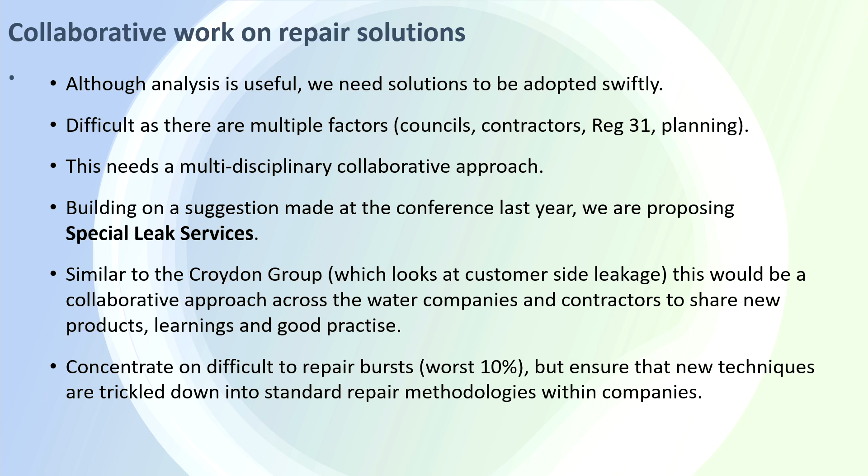Needs at least 5 disciplines in there, and this is why I said it's multidisciplinary. Planners - we need people that can identify quickly this is a tricky job. Those are your people that look at this and go, oh, it's a nightmare, look where that one is. You know those people in your teams, the ones who go, right, okay - the ones you go to when you've got a difficult job and ask, can you look at this one? Those are the kind of people we need in this team. We need some really good planners.

We need regulatory people. There's going to be water quality issues. Tim was talking earlier about our no-dig solutions and things like that. We know water quality is going to be an issue. But also regulatory is about dealing with the councils, where you turn around and say, I'm sorry, these are the rules, this is how I have to operate. We need people who actually understand those rules and go, yes, but there are exclusions to those, and this is where we want to work as well. Okay, what if we did a small hole - what we call low-dig solutions? What difference would that make to your council regulation if we could do that? So we need people that understand that regulatory side.

We need interruption specialists. With the 3-hour interruptions to supply, we need to make sure we get that water back on quickly. So there's a lot of work that goes into saying, okay, how do we interrupt that in such a way that we can carry out that repair quickly? How do we do overlands? How do we do bypasses? How do we manage that interruption so we can actually work upon that pipe when we want to?